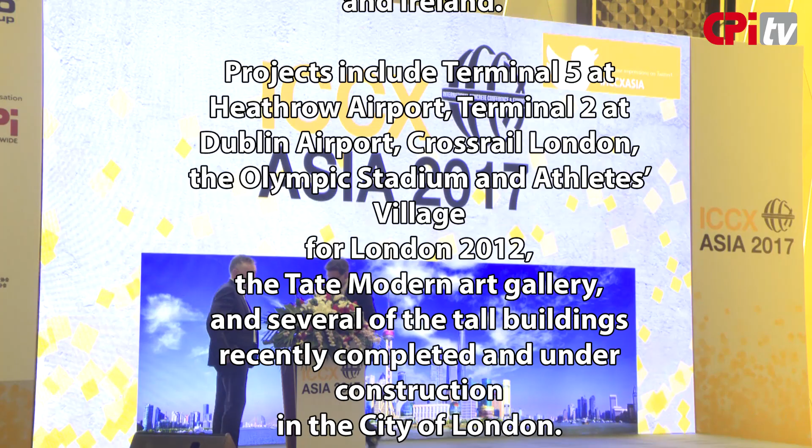Hello everybody and good morning. Just a bit of background on myself. I'm the convener of task group 6.7, precast concrete in tall buildings. I'm part of Commission 6 of FIB, and the task group brings together many parts of the world that use precast concrete. We have members from Europe, North America, Brazil, Asia, and Australia. So we have quite an arrangement of members.

I myself am a consulting engineer. I advise producers, I advise contractors, and I don't necessarily just get involved in precast concrete. So often I have to convince people that there is a benefit in precast concrete, that they should use it because they will get something from it.

So firstly, we need to sit back and see what benefits we should actually seek from using the material. In any project, there are three benefits we should be seeking. We should firstly be looking at cost. Are there any savings? Is there certainty in the cost?

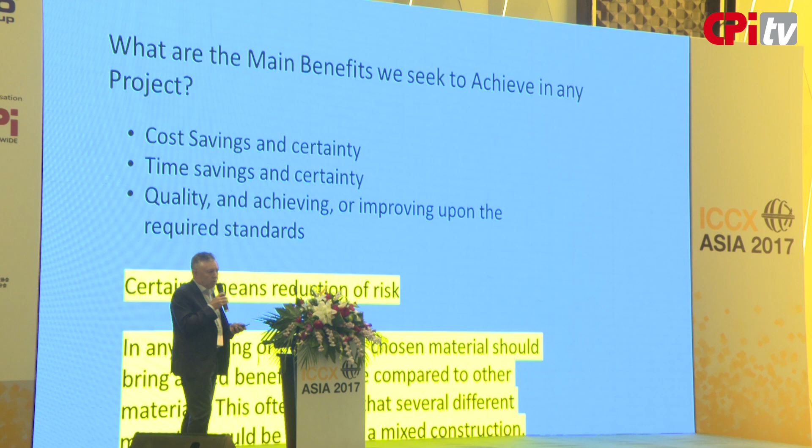And then finally on this list, any building or project, the chosen material should bring added benefits or value compared to other materials. This often means several materials could be chosen in a mixed construction. I know a lot of the talk so far has been about precast concrete buildings as such, but often precast concrete is used with other materials, because other materials often give a better solution for everybody.

So we all think precast concrete is a nice product, but at the end of the day, precast concrete has to be shown to bring the benefit. We don't use it because it's a nice product, we use it because it gives us a benefit.

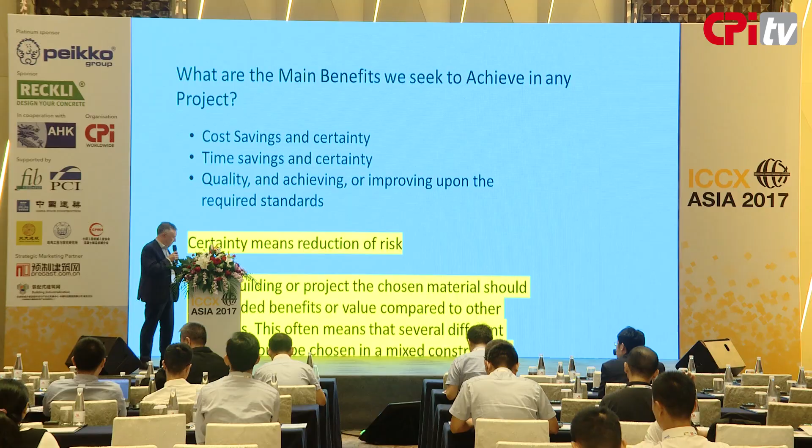There have been a number of talks before me, and some of the material I have in this presentation may have already been covered. So if that is the case, I will move quickly between the slides. If you need me to come back, then I will come back.

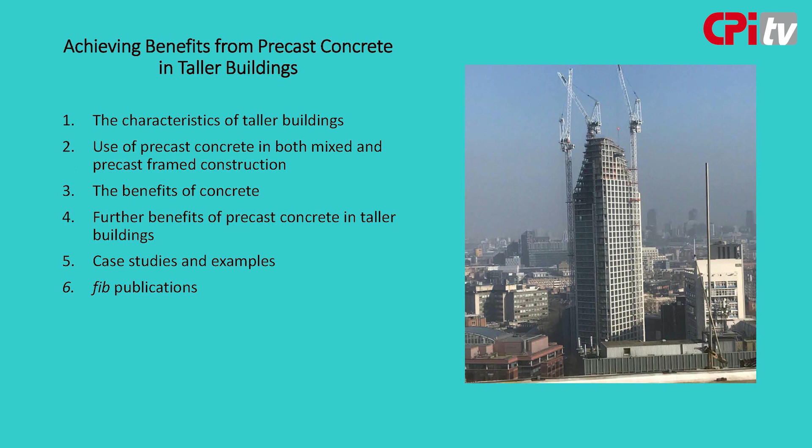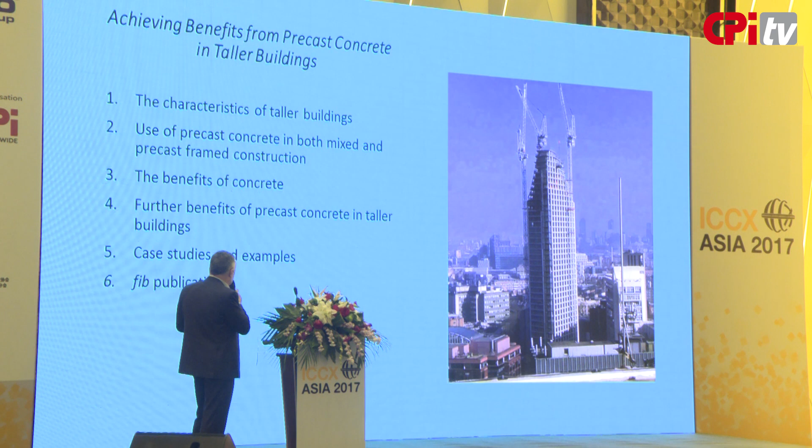I've actually split the presentation into 6 parts. The first part looks at the characteristics of taller buildings. I then look at the use of precast concrete in both mixed and precast concrete frame construction. Then the benefits of concrete as a material in general, and the further benefits we can hope to achieve by using precast concrete in taller buildings. Finally, some case studies and examples, and a look at fib publications that relate to precast concrete in tall buildings.

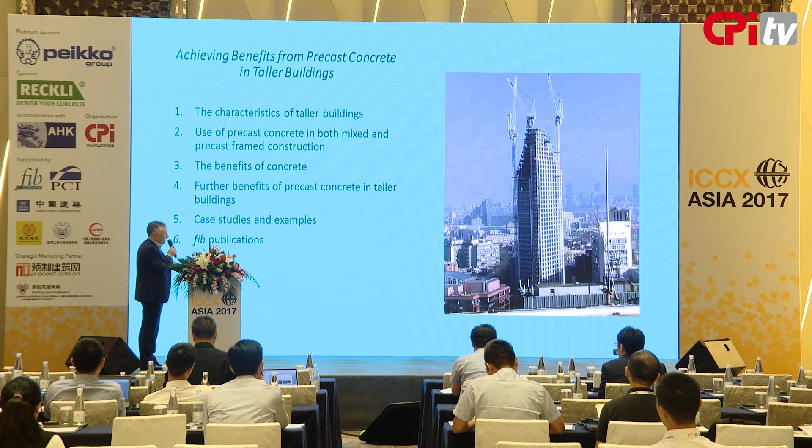So looking at tall buildings in general, the previous speaker spoke about heights and stories and so on, but often there's an aspect ratio used to try and define a tall building, and the one generally chosen is 5. On the left, you can see a building with a ratio of 6:1, 150 meters tall by 25 meters wide.

And then we have a building that's 4:1. On the basis of the definition of 5, the building on the left would be a tall building, the building on the right would not be. But obviously, it's not as simple as that.

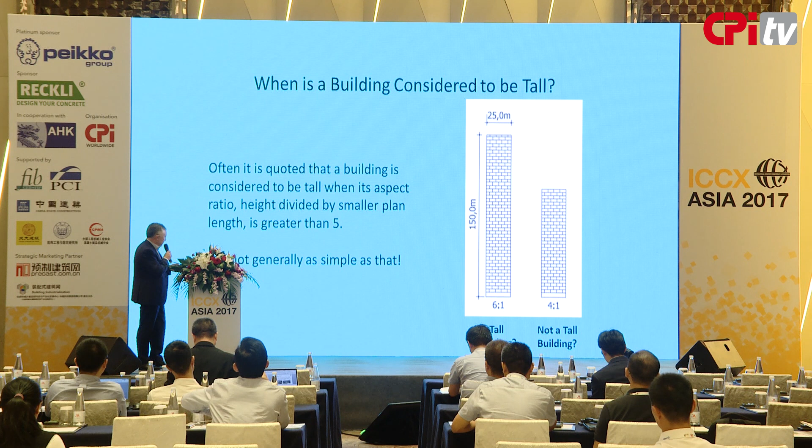The Council on Tall Buildings and Urban Habitat has come up with 3 categories to define a tall building: height relative to context, proportion, and different technologies relevant to tallness.

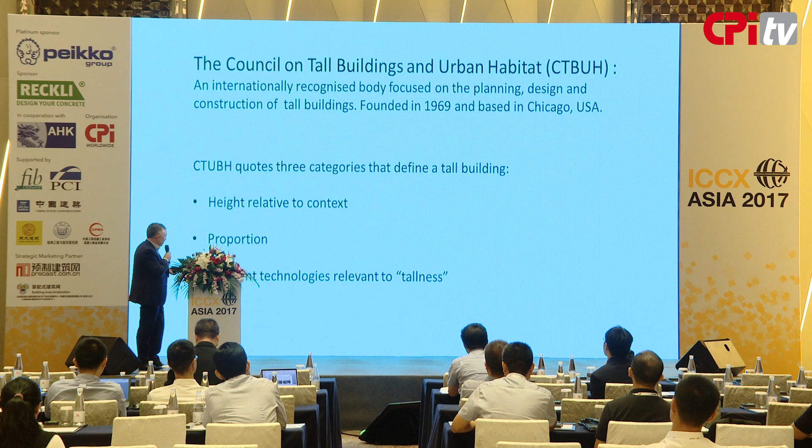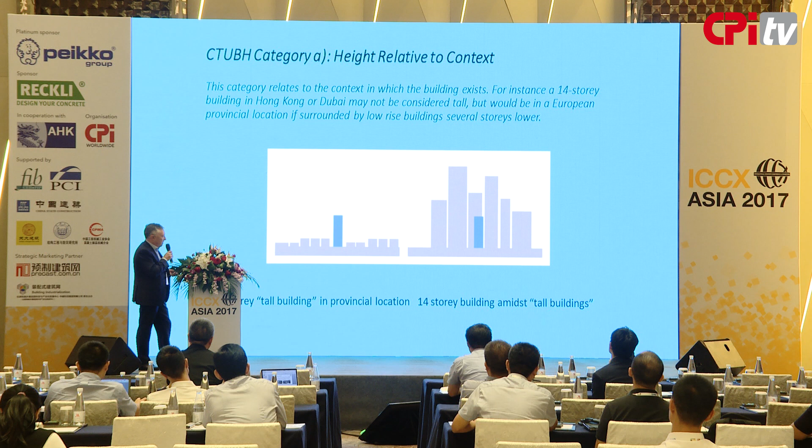So for instance, a 14-story building in a provincial location may be considered tall, but in an urban location in a very dense city would not be considered tall. And then we might get a slender building in an urban landscape, or a building with a large footprint.

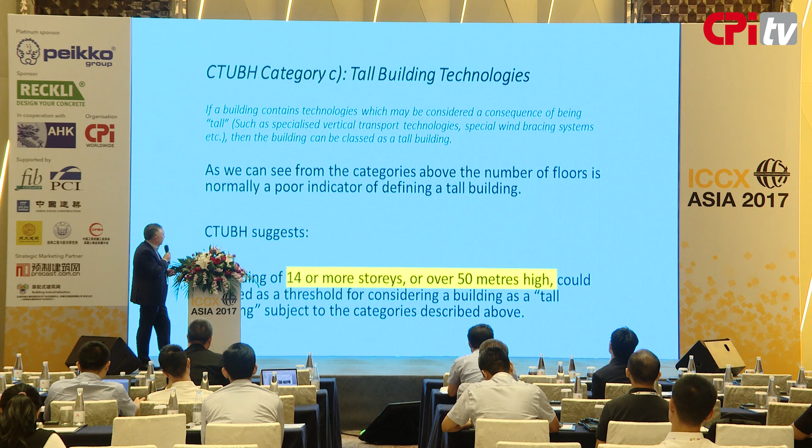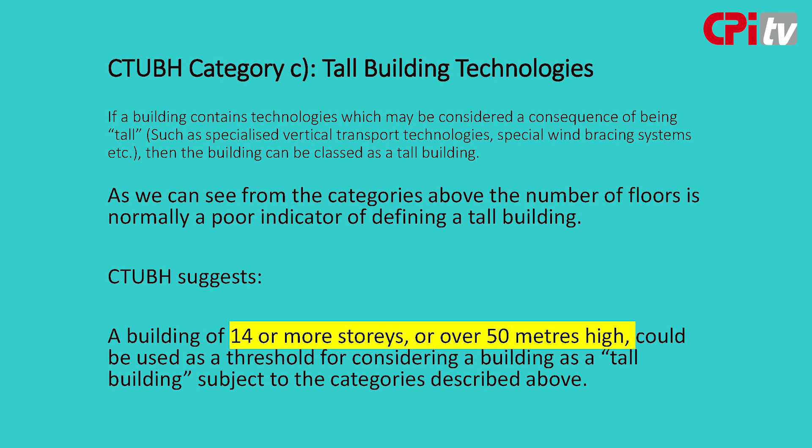Just to summarize, and I know this has been mentioned before, one of the suggestions of CTBUH is that 14 or more stories, or over 50 meters, could be used as a threshold.

So what are the characteristics of a tall building? Well, often they have relatively small footprints, normally because of high land values and restricted space. They have a mixed occupancy with normally car parking at lower levels and then either residential or office space above.

The structural engineer has to take account of the relative magnitude of the lateral loading, whether it be wind or seismic, which increases compared to vertical loading. And the cores in the tall buildings are very important, not only to accommodate lifts, but they give you a means of fire escape and provide stability.

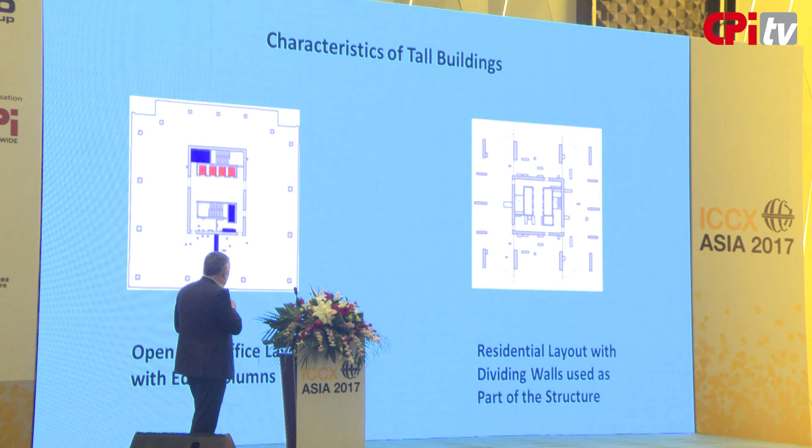So just looking at 2 typical footprints. On the left, we have a typical office: small footprint, central core providing stability, and a number of outlined columns that transfer the vertical load.

On the right, we have a residential layout with dividing walls. You'll see that not all the walls are continued, and the tendency in Europe is to minimize the amount of structure. So we would use what they call blade columns. They would be in the area allocated for the walls. Space would be left in case later on they wanted to change the residential building into an office. It gives the flexibility to change the occupancy of the building.

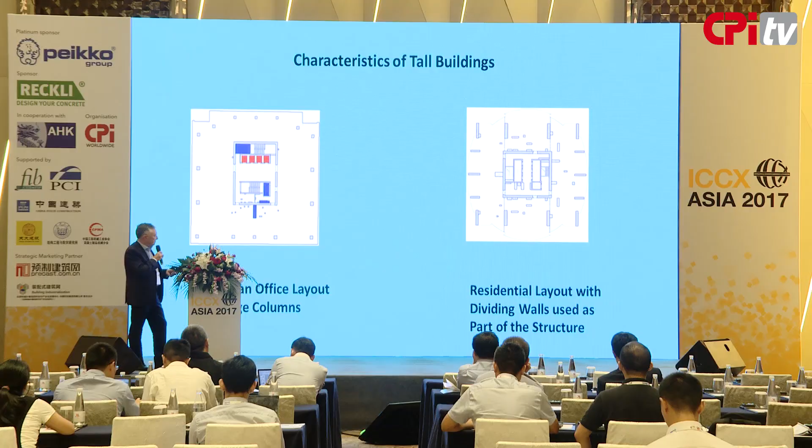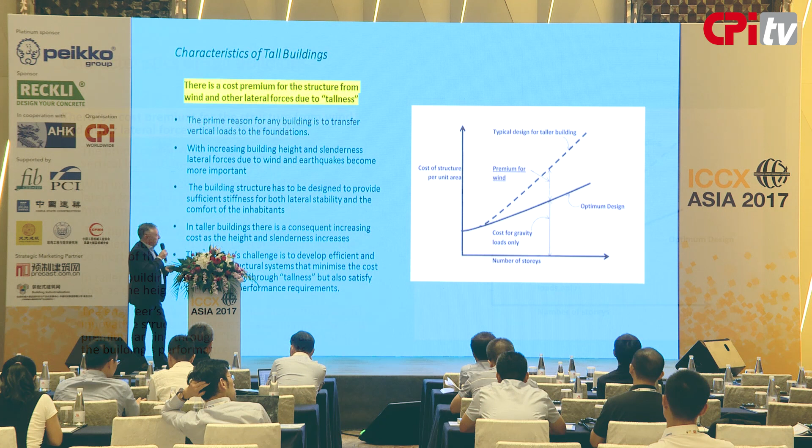In any tall building, there will always be a cost premium from the fact that the building is tall. On the right, you'll see a very simple curve. The bottom curve shows the optimum design if we were designing for gravity loads only. As the number of stories increases, we then have to pay a premium for the wind and seismic forces that increase as you go taller. And you can see that premium has to be paid no matter what material is used for the building.

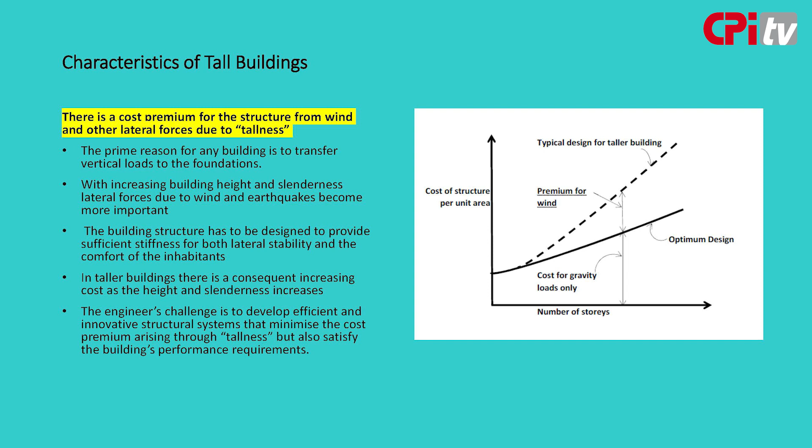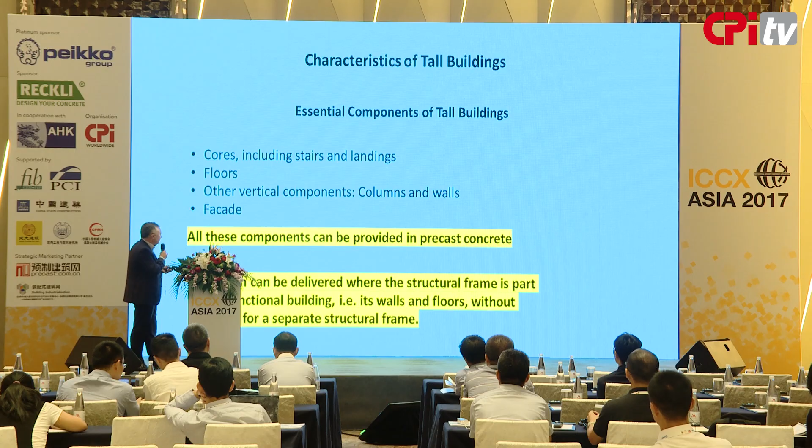So in a tall building, we have some essential components. These essential components are the cores, the floors, the vertical components that are required to transfer the loads, whether they be columns or walls, and the facade that envelops the building. These actually form the building. They may not necessarily be structural components, but all these components can be provided in precast concrete.

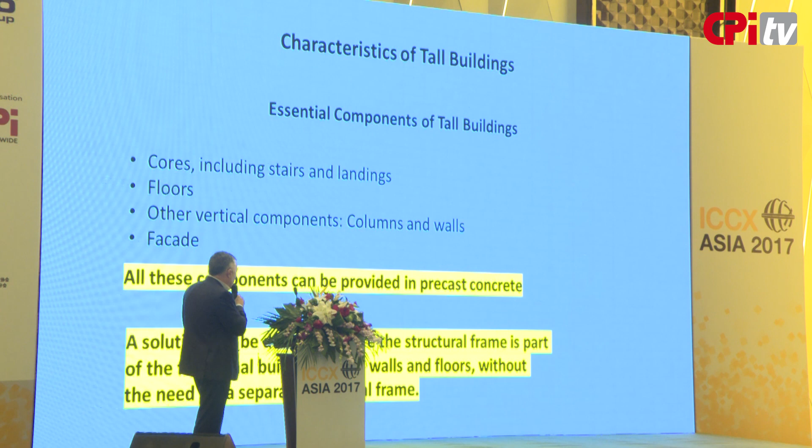So we can deliver a structural frame that takes the form of the building with no requirement for a separate frame as you would in steel. So this gives a benefit when using concrete.

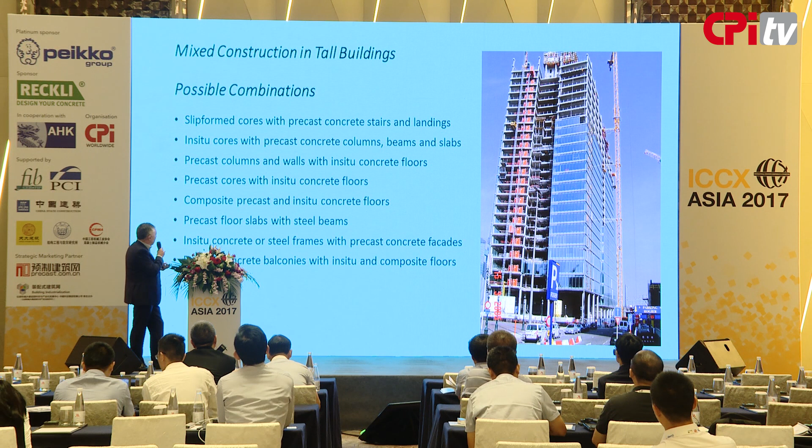I mentioned earlier that we can have mixed construction, and this mixed construction can take several forms. We could have a slip form core with precast concrete stairs and landings, in situ cores with precast concrete columns and beams, precast columns and walls with in situ floors, and so on. There's numerous combinations, and we can choose whatever combination we like for our particular building.

In framing systems, there's a chart there on the right, which some of you may be familiar with. This comes from work by Khan, I think it was in the 1970s, and splits tall building design into 8 categories, starting from the simplest, which is a simple framing system, up to about 20 stories, and then going on to various tube systems that can go up to 100 stories and above.

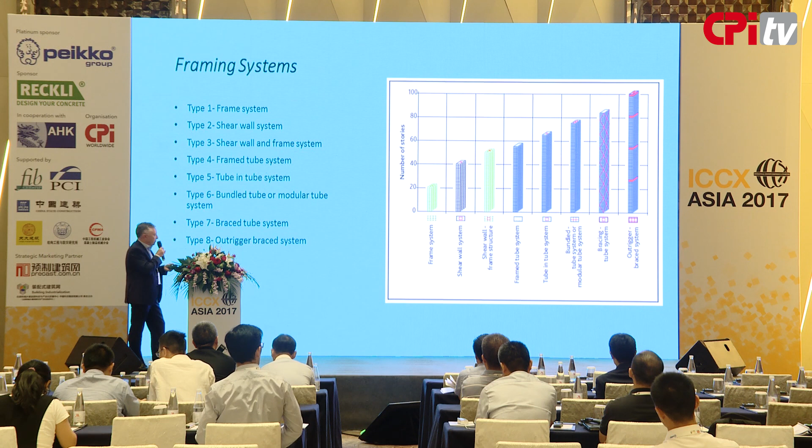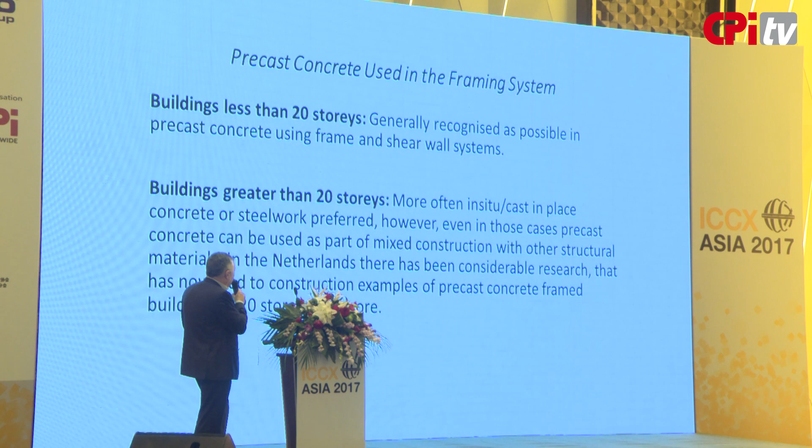So within those framing systems, precast concrete generally is recognized as being a possible solution using frame and shear wall systems for buildings up to 20 stories. For buildings greater than 20 stories, we then begin to use tube systems, and often in situ or cast in place concrete or steelwork is preferred for that. But we do have some examples later of using precast concrete.

In Europe, in particular, we use a lot of walled construction for taller buildings, particularly in residential areas. And there's 3 examples here of how we can develop a framing system for particular types of applications. So on the left, we have a shear wall system. In the middle, we have coupled shear walls. And on the right, we have a frame tube with a central core.

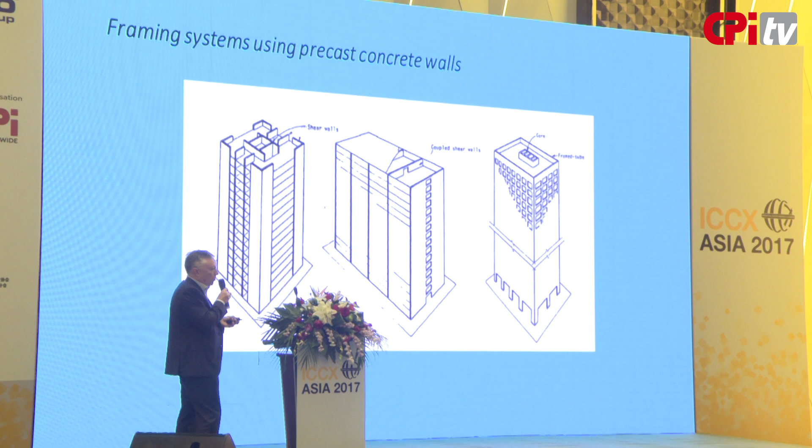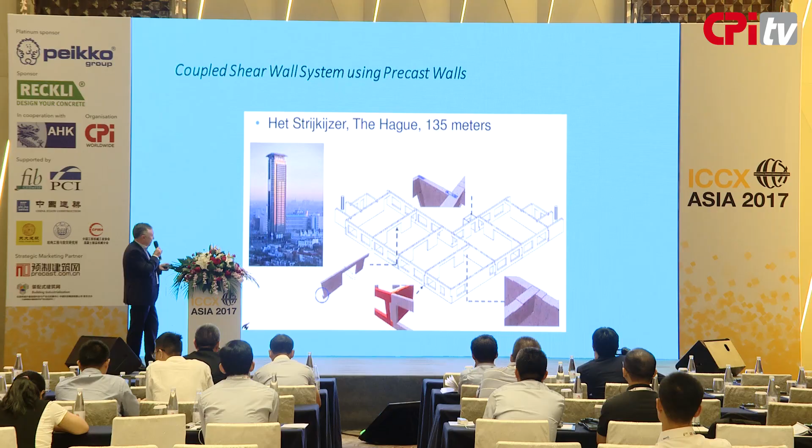Fire resistance is obviously very important, particularly in tall buildings. In concrete, we have resistance. The structure will retain its load-bearing capacity. Even in the recent disaster in London, where they had the fire at Grenfell, the concrete frame still stood up, even though the building was exposed to a very serious fire.

Integrity: the structure should protect people and goods from flames, harmful smoke, and hot gases. That means that the concrete itself doesn't break down. And isolation: the structure should shield people and goods from heat.

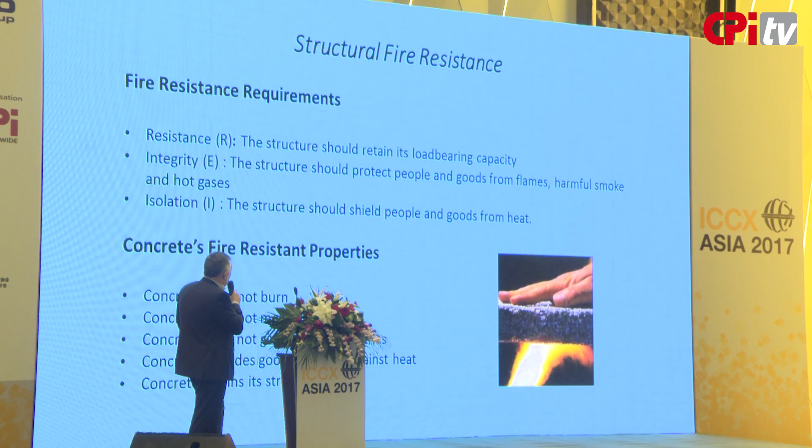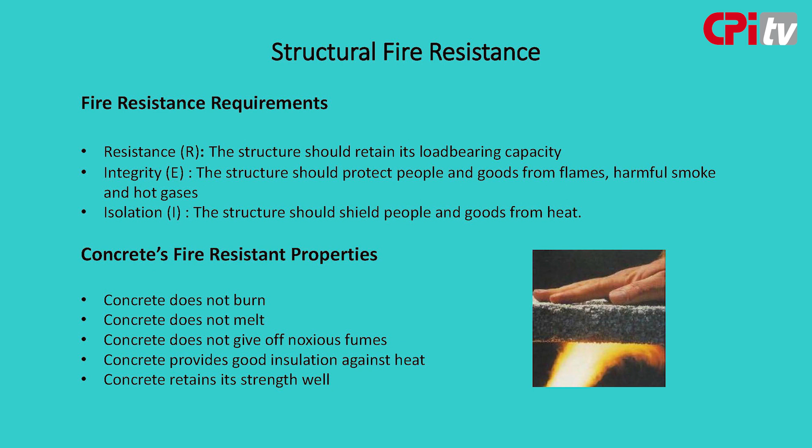So concrete has these very good fire-resistant properties. It doesn't burn, it doesn't melt, it doesn't give off noxious fumes, it provides good insulation against heat, and it retains its strength well.

Just looking at acoustic separation as one example, I've seen a lot of buildings where often strength only is considered as the primary requirement for the building, and sometimes, particularly in apartments, sound can be ignored. But sound is very important. If you live in an apartment, you don't want to hear what your neighbour's doing, either above or sideways.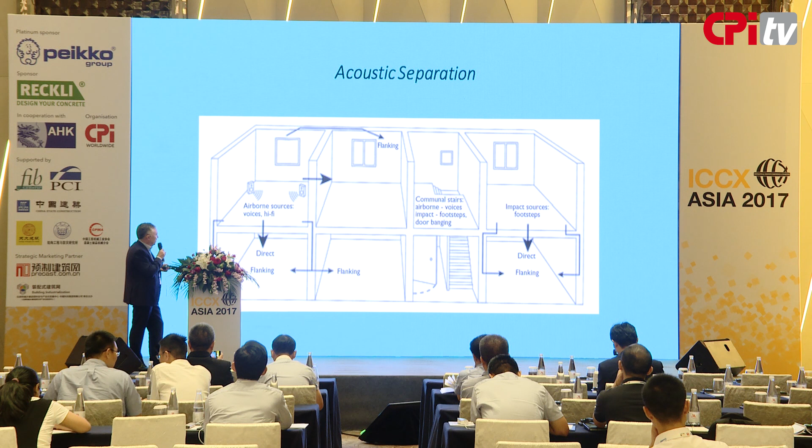You get several different types of sound transmission. You get direct sound transmission, you get flanking sound, which normally goes through joints and so on, and you get impact sound.

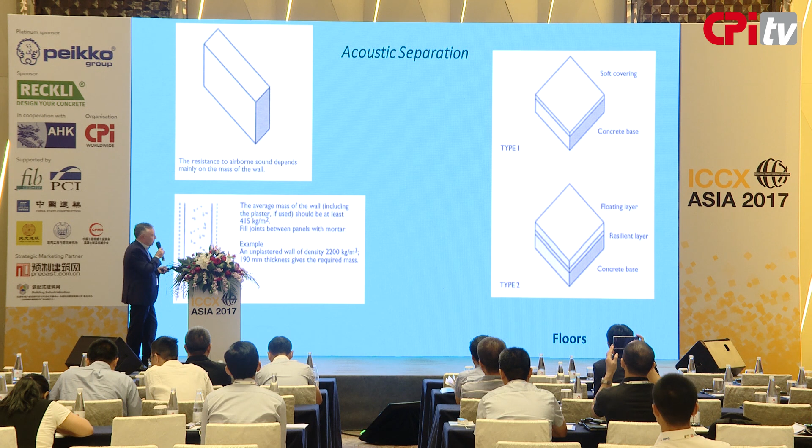We normally combat this in concrete by providing mass. Mass generally will resist direct sound, and provided attention is paid to the joints, flanking sound. For impact sound, we need some sort of soft covering or resilient layer to stop that sound transmitting through floors.

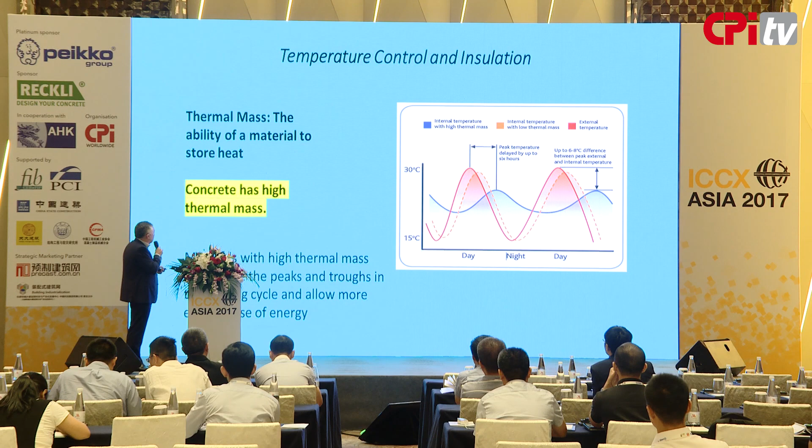Temperature control and insulation. Concrete has very good thermal mass, and the definition of thermal mass is the ability of a material to store heat. So if you look on the right, you will see that in general we have these high peaks and troughs. But if we store our heat in the concrete, if you look at the blue line, that evens out a lot more, so we can control the temperature of our building and the individual rooms a lot better.

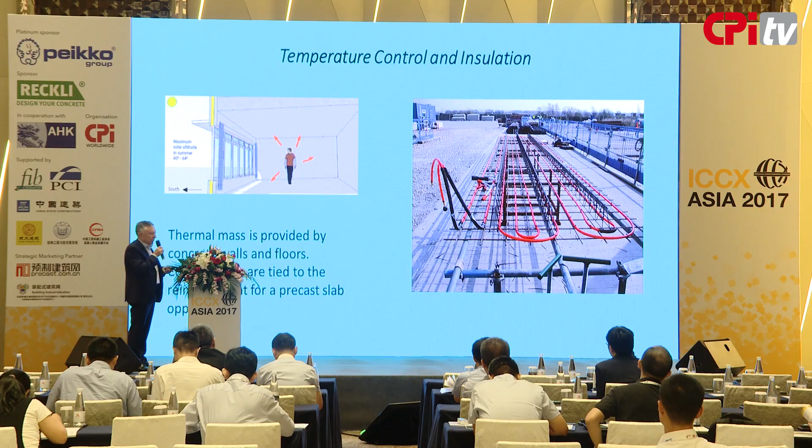In precast concrete, we can take advantage of this. We can have our heating system within the floor slabs as shown here. Pipes are run, and we can control the temperature in the building. The pipes are contained inside the precast slab, and then we connect up to the heating system. So there's the potential to avoid air conditioning units and so on. We control the temperature in the building through the flooring system.

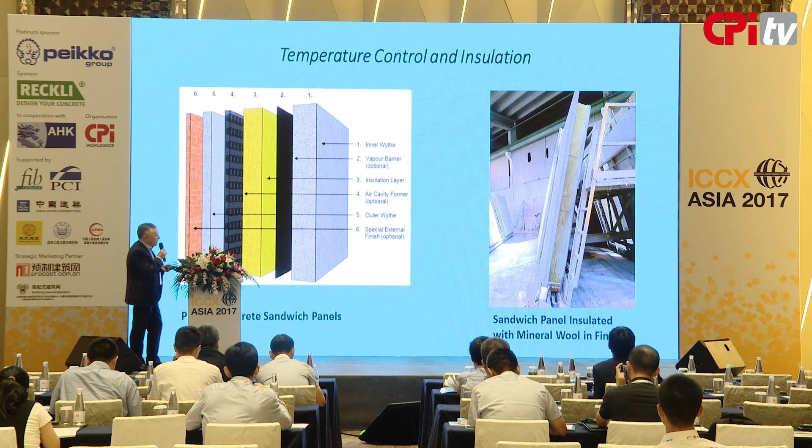We can also insulate the building, again, by controlling the temperatures inside by using precast concrete sandwich panels. There's an illustration on the left showing the various components of a sandwich panel, and on the right you can see a very thickly insulated sandwich panel of a photo taken in Finland, which has very, very cold temperatures.

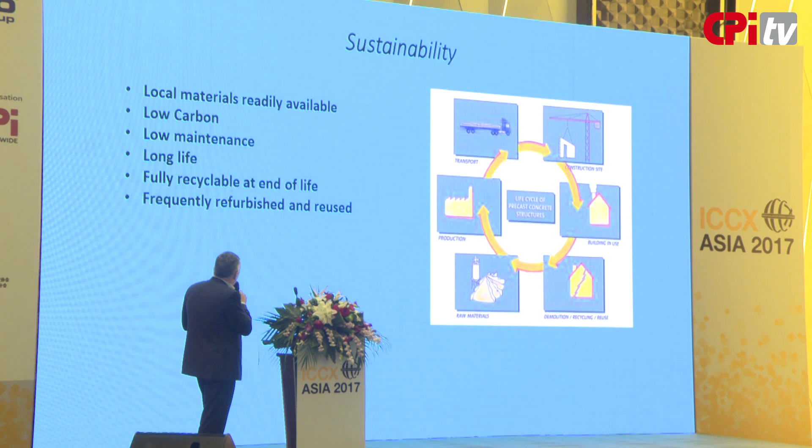Sustainability is another possibility, and again in concrete we have local materials, readily available materials. We have low carbon, low maintenance, a long life, fully recyclable, and frequently refurbished and reused.

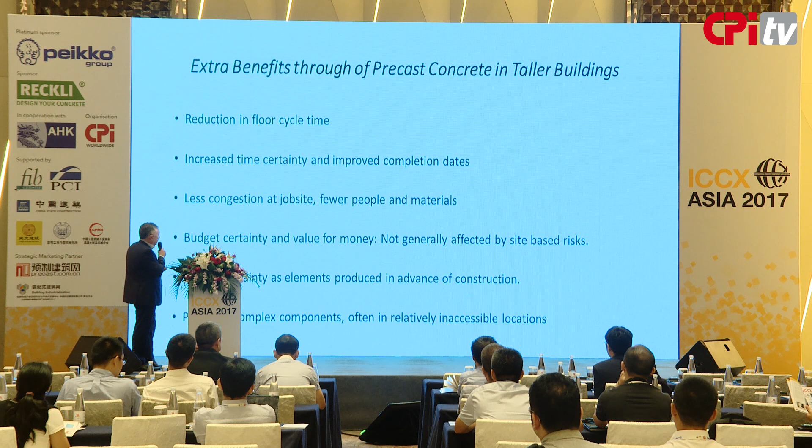So they're the benefits of concrete itself, but precast concrete can also bring us additional benefits. These are a reduction in the floor cycle time in tall buildings, increased time certainty and improved completion dates, less congestion at the job site, budget certainty and value for money, quality certainty, and providing complex components often in inaccessible locations.

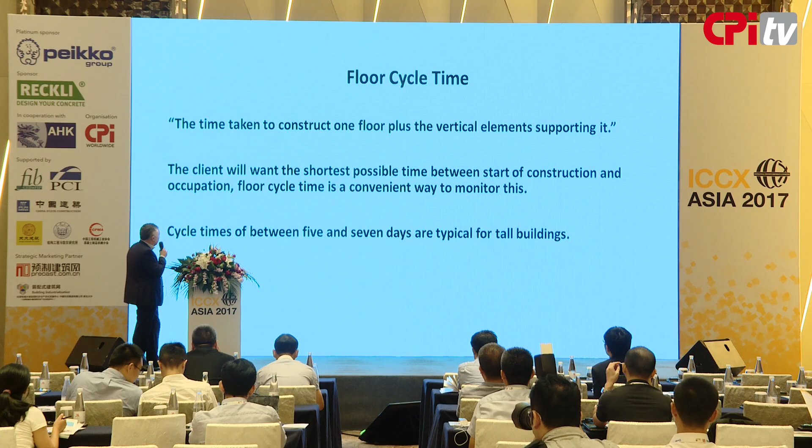So the first point on the list was floor cycle time, and this is generally defined as the time taken to construct one floor plus the vertical element supporting it. Floor cycle time is often used as a control on the construction of a tall building. The client and the contractor will want as short a time as possible with this, and cycle times between 5 and 7 days are typical for tall buildings.

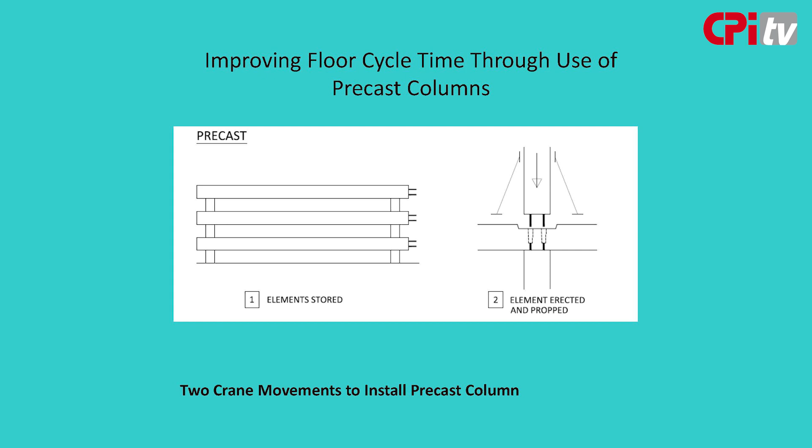Just giving you a very simple example of how we can improve the floor cycle time. Often precast columns are used to support floors in tall buildings, and that's because often they have a big impact on the floor cycle time. So for instance, if we were using precast, we might offload the elements and store them, and then we erect the element as shown there on the right. So we have 2 crane movements to install the precast column. For an in situ column, we require 6 crane movements, as you can see on the illustration on the left.

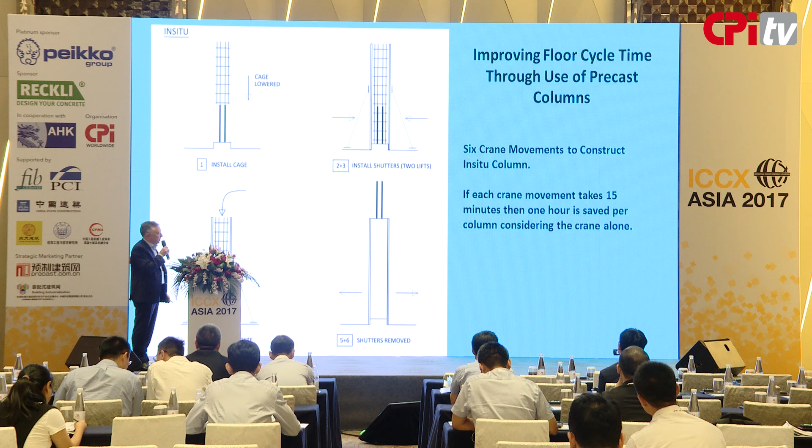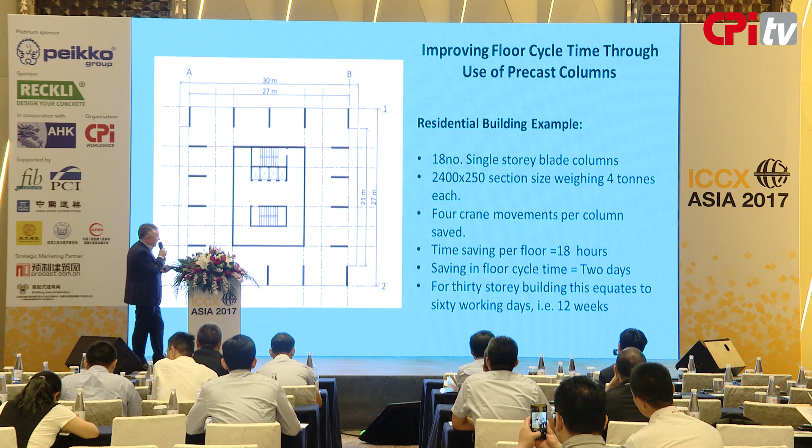So if each crane movement takes 15 minutes, then 1 hour is saved per column, considering the crane alone. And if you consider how many columns there could be on a tall building, that equates to a very substantial time saving. This is an example of what could be saved, and on this particular example, just by using precast columns, we saved 12 weeks on the building completion date.

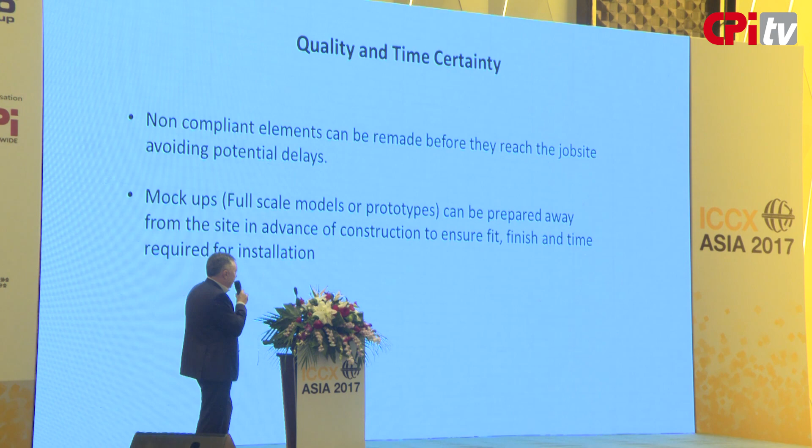Quality and time certainty. With precast concrete, non-compliant elements can be remade before they reach the job site, avoiding potential delays. We can also prepare mock-ups, that is full-scale models, away from the site in advance of construction to ensure that we get correct fit, finish, and we can assess the actual time required for installation.

This was a large residential development with 1,000 apartments. There were 8 individual blocks being built simultaneously, with floor cycle times critical. The vertical elements in the floor cycle per block would take 3 days in precast and 2 weeks in situ. So there was 7 working days saving per floor, and for 18 floors, this required a 25 weeks saving in time.

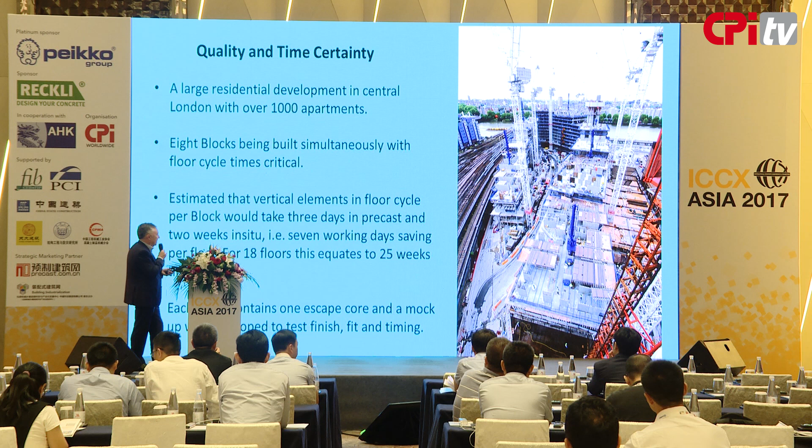Each of the blocks contained an escape core, and a mock-up was developed to test the finish, the fit, and the timing. This is a full-scale mock-up of a single story of one of the escape cores.

Just going back a second, this mock-up was then achieved on site. The finished building was achieved on site. You can see on the left the same core in the building itself, and on the right you can see the site. We had slip form cores alongside our precast cores, so the bigger cores were slip formed and the smaller cores were made in precast.

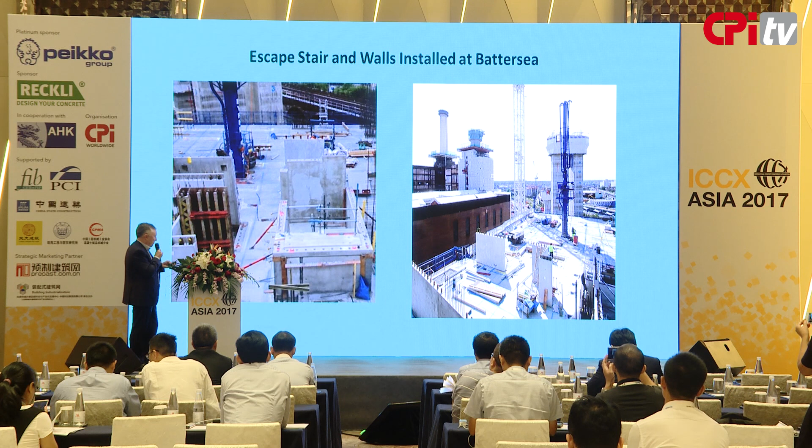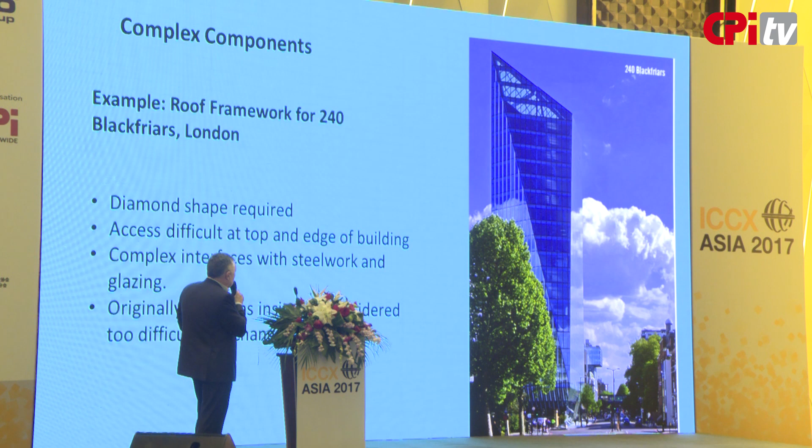Complex components are also a potential benefit we obtain from precast concrete. In this example, we have a tall building in London at Blackfriars. The building itself was mainly in situ concrete and steel, but they had a tricky roof detail at the very top that was originally supposed to be an in situ main frame with various steel supporting members attached to it.

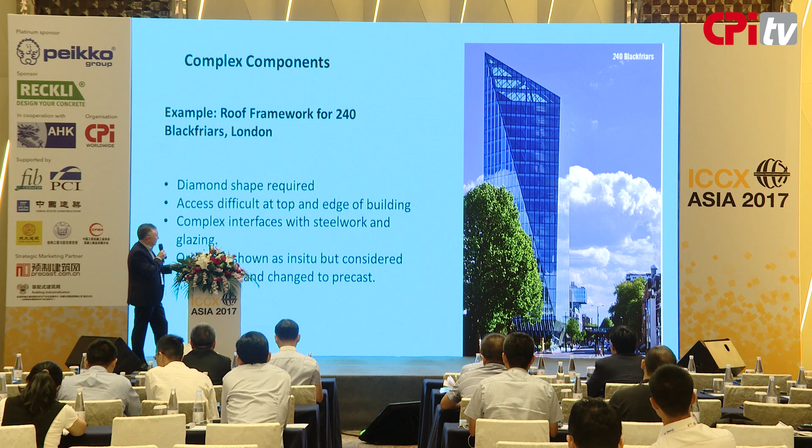This proved impossible to do as a cast-in-place solution, and we finished up with a precast solution. You can see, particularly on the left, we have a finishing element that completed 2 columns that met at a point. This would have been extremely difficult to do in any form other than precast concrete.

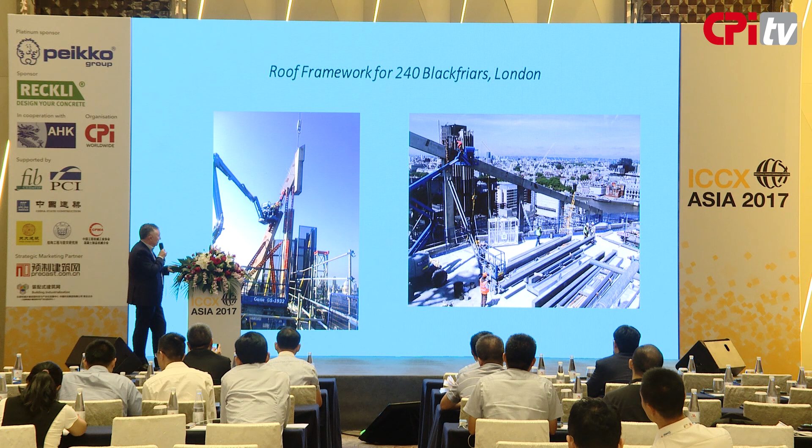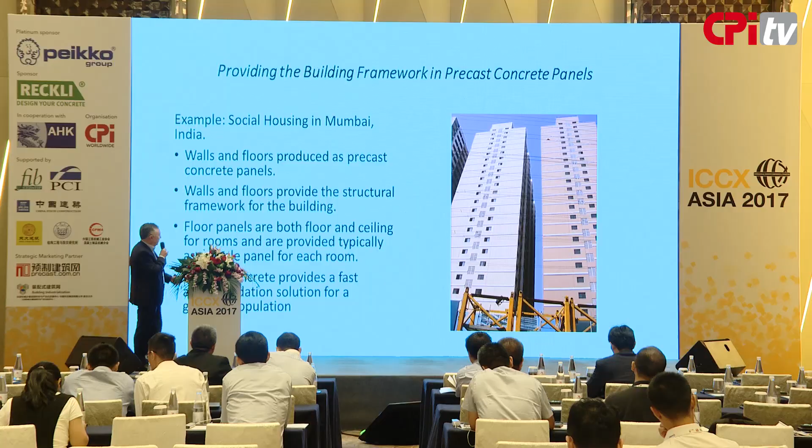You can see here them lifting the components into place. They're using this system in Mumbai to achieve the social housing they require there.

We can also push the boundaries with precast concrete in terms of shape. The Bella Sky Hotel in Denmark was the winner of the FIB Award for Outstanding Concrete Structures in 2014. It leans 2 ways, it twists. It's a very unique building.

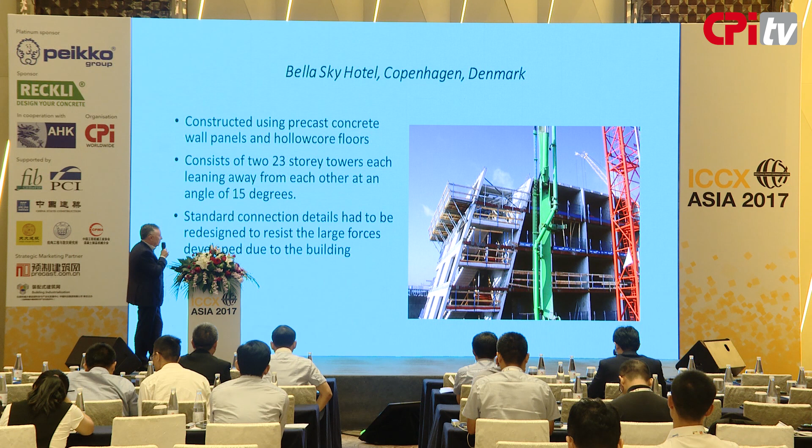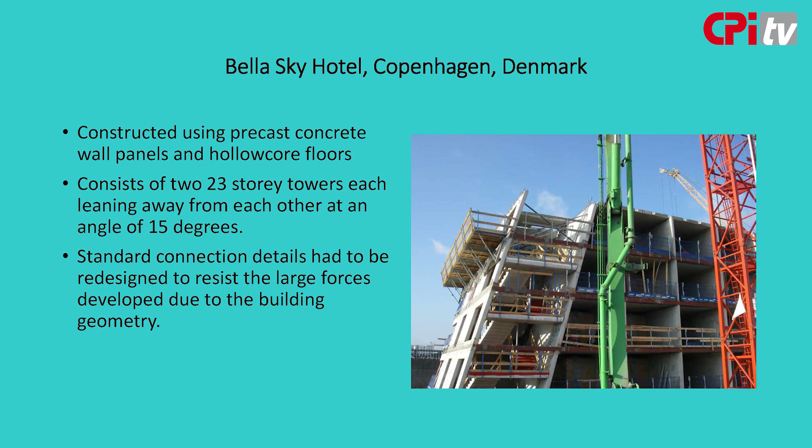This just gives you an example of the type of precast used on this building. We had a sloping facade, but an internal building that was vertical. As you can see on the left, the load-bearing elements come down vertically, and then we have the sloping elements attached to the load-bearing elements.

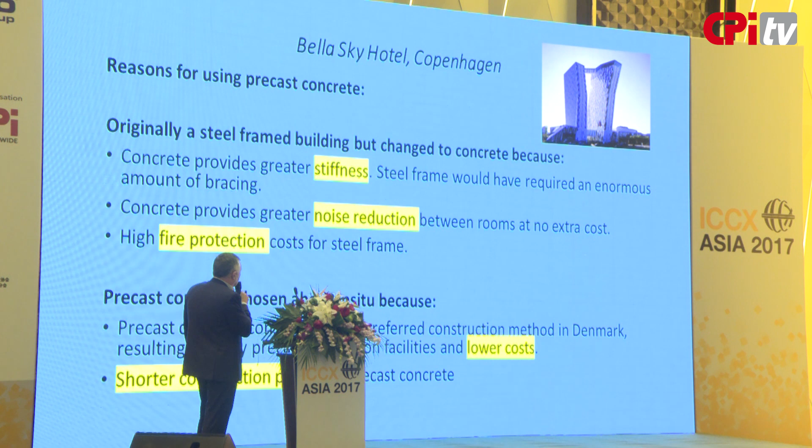So why did they choose precast concrete for such a complicated building? Well, originally the building was a steel frame, but the concrete provided greater stiffness, which was an advantage over steel. Because it was a hotel, they wanted noise reduction at no extra cost, which they got from the precast concrete walls and floors. They also achieved high fire protection with little extra cost compared to a steel frame.

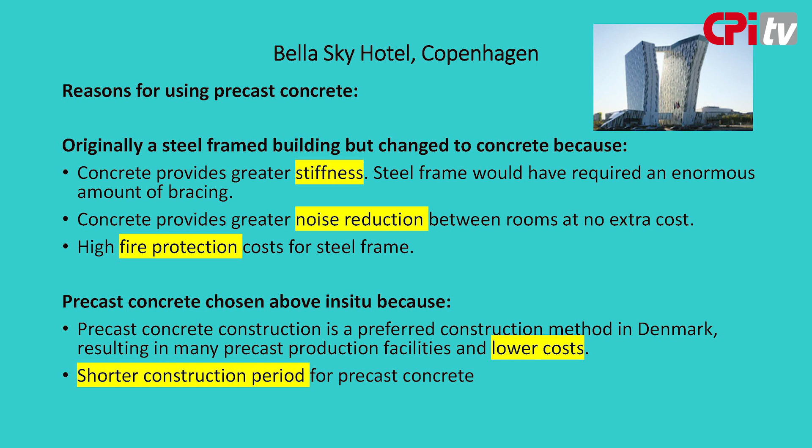We could have got all those advantages from in situ concrete, but in Denmark they chose precast concrete because it was lower cost. This was because precast concrete is an indigenous, preferred construction method in Denmark compared to in situ concrete, and it allowed a shorter construction period.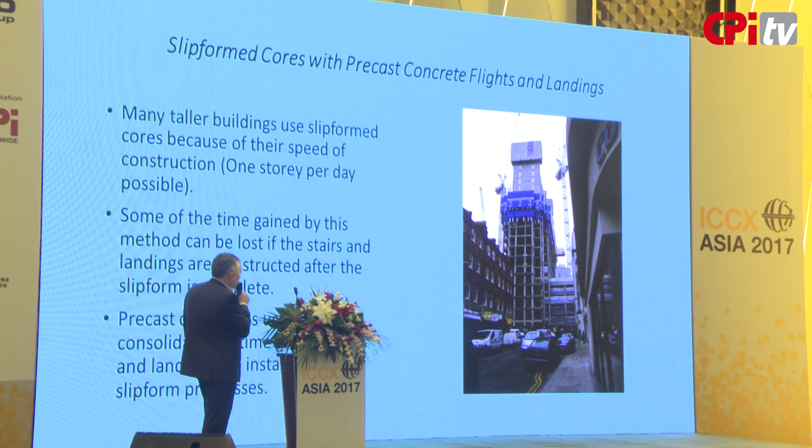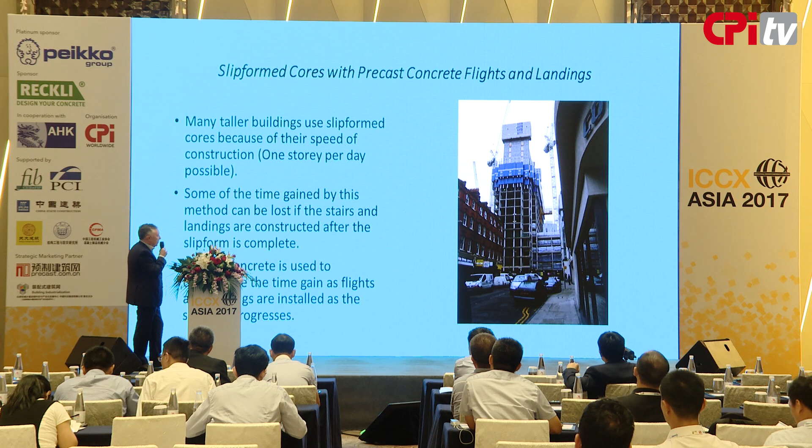We also use precast concrete with slip form cores, which is quite common in a lot of urban areas. This is an example in London. We have the slip form core, we have an in situ floor, but we have precast concrete columns and walls that come up with the slip form, as you can see, and also precast concrete stairs and landings. This shows how you can mix the forms of construction.

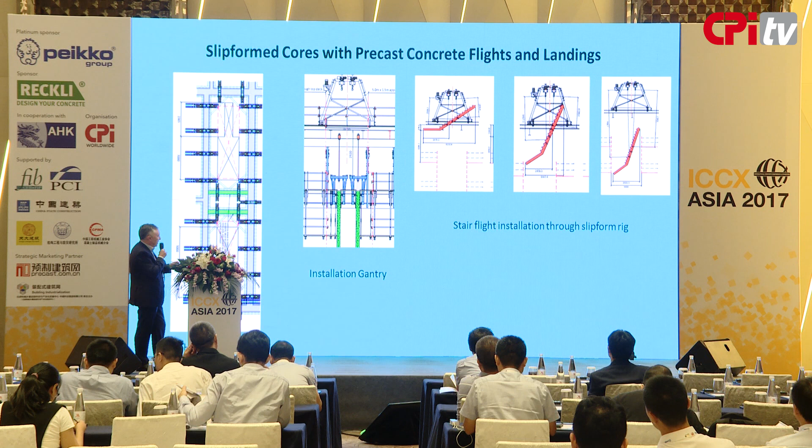This is another example, in London at Canary Wharf, of a slip form core where they used precast concrete stairs and landings, installing them as the slip form progressed. Often there's a problem with time because they have to complete the slip form and install the stairs and landings afterwards, but in this case the two went together simultaneously. This was achieved because they had a gantry built on top of the slip form, which then lowered the stairs and landings into place as the construction progressed.

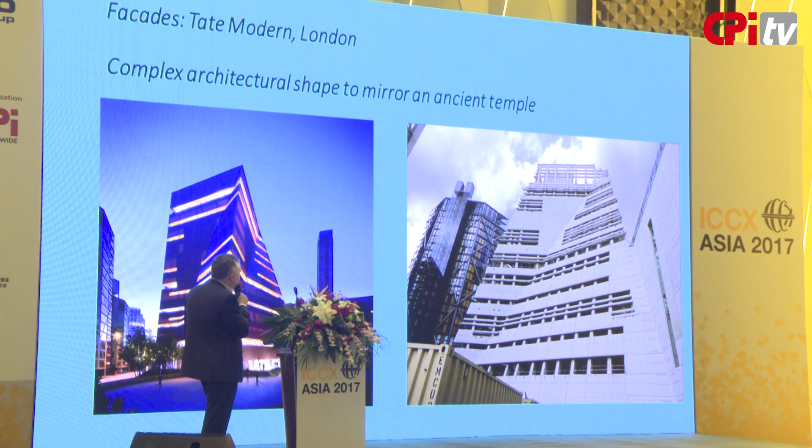We also have architectural shapes that we can achieve. This is the Tate Modern in London. On the left you can see the finished building, and on the right you can see the precast concrete during construction.

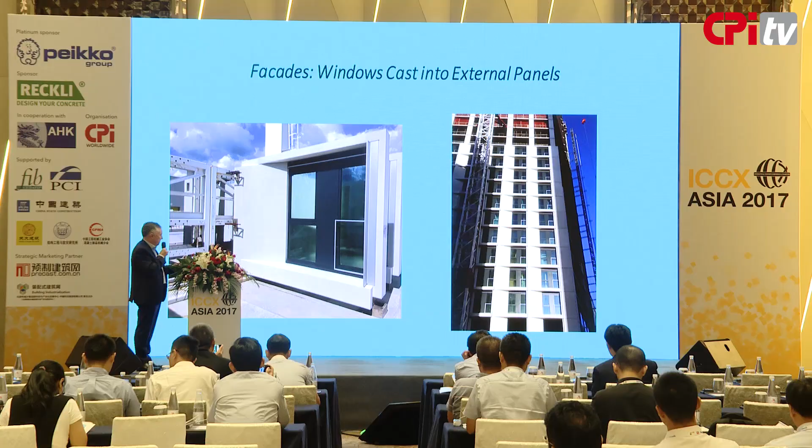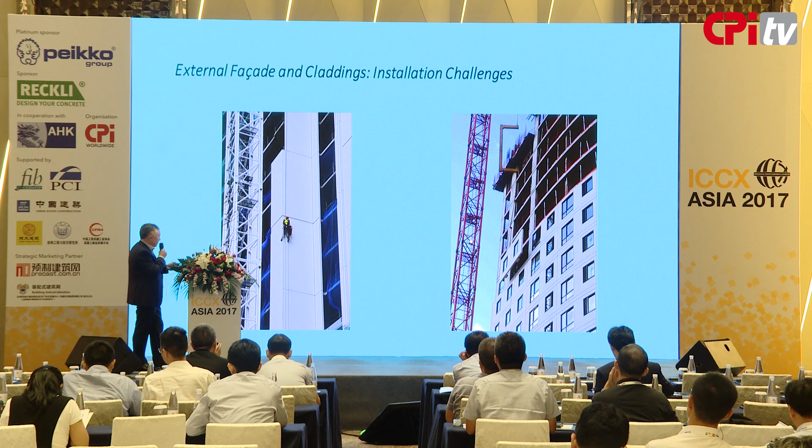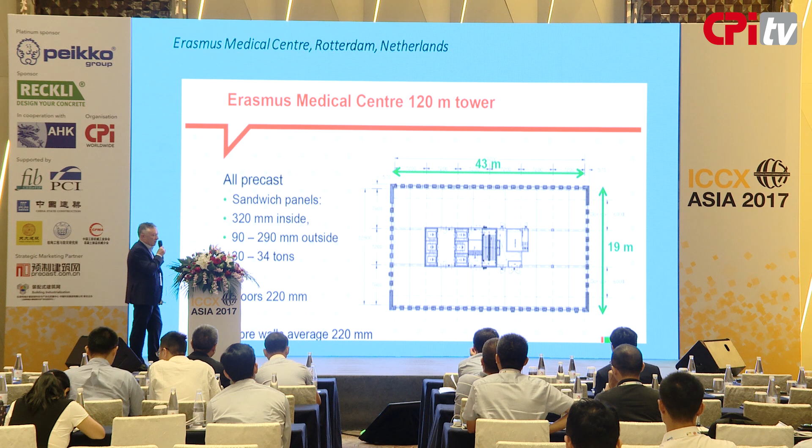They had a challenge that they had to meet a specific schedule, and the use of a tower crane needed to be avoided. So in this case, they built a shed and installed the panels inside the shed. In fact, they were working in a factory as they produced the building.

Often with the tower crane, you waste a lot of time lifting the element vertically, lifting it across horizontally, and putting it in place. In this case, because it was split, they saved that time, and they managed to reduce the cycle time down to 5 days.

They had little influence from wind on the construction process because they were working inside the shed. The shed also enabled non-structural construction to start immediately after the precast. It's very clean and dry, and obviously reduced risk of disruption because of weather and so on.

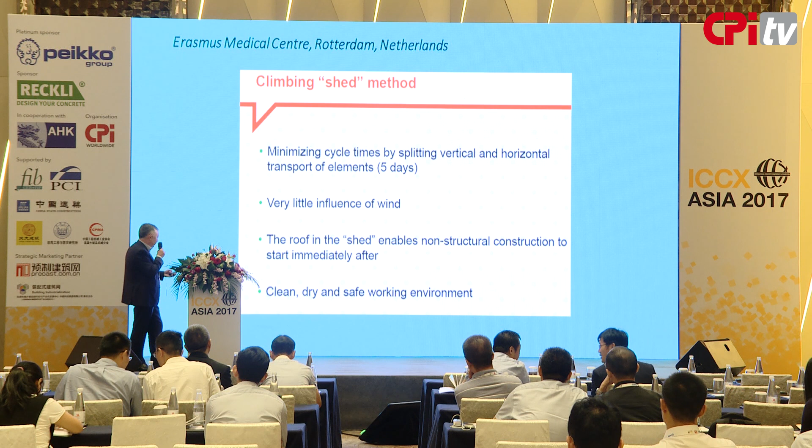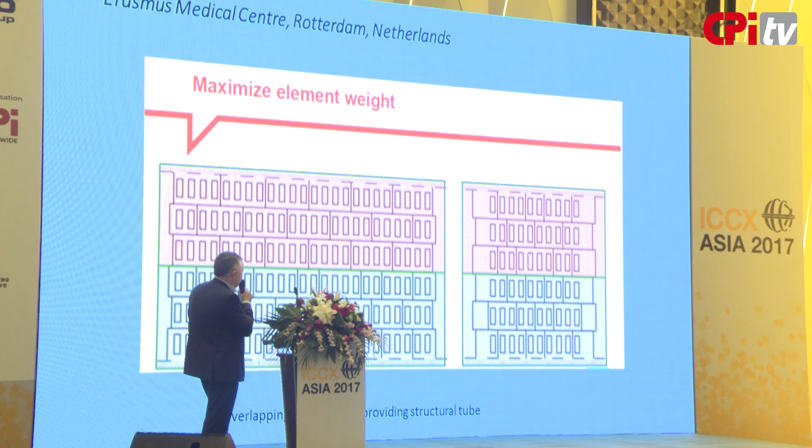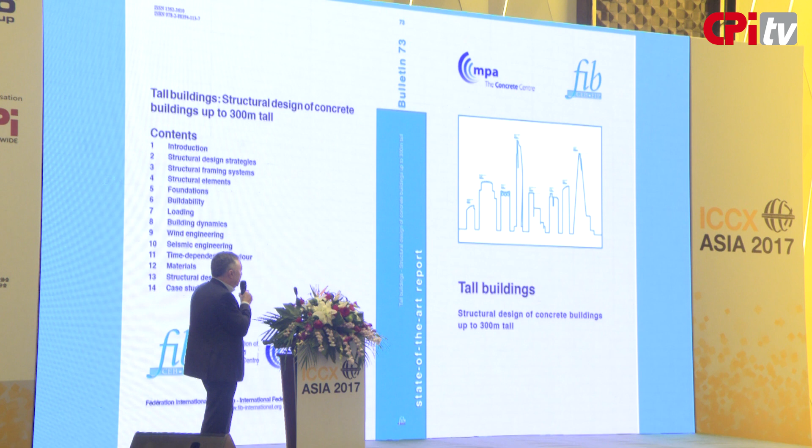Just finishing off on some FIB publications: there is already a state-of-the-art report on tall buildings. This report covers the design of buildings in concrete, not necessarily precast, but it gives you the design methods to assess a building that is built in concrete, a tall building built in concrete up to 300 meters tall.

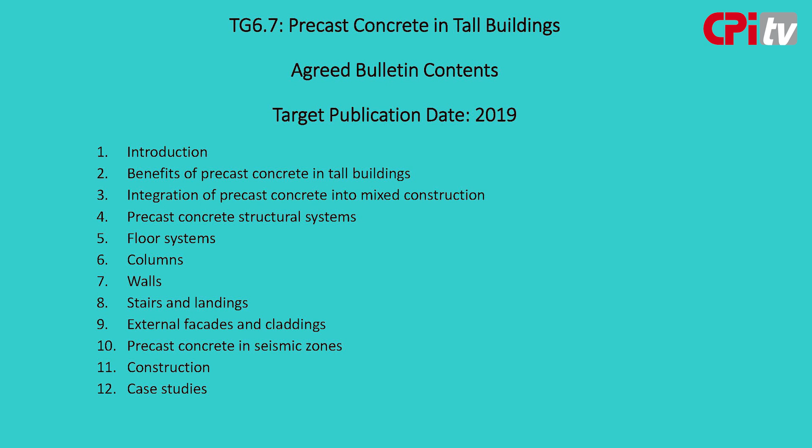We are now involved in the preparation of our bulletin, Precast Concrete in Tall Buildings. We have 12 chapters. We've split them into the type of systems that can be used, and then the elements that form those systems, and we go into some detail then on connections and how we achieve a solution in precast concrete for tall buildings. And we finish off with a lot of case studies from across the world, looking at examples from all of our members, including China.